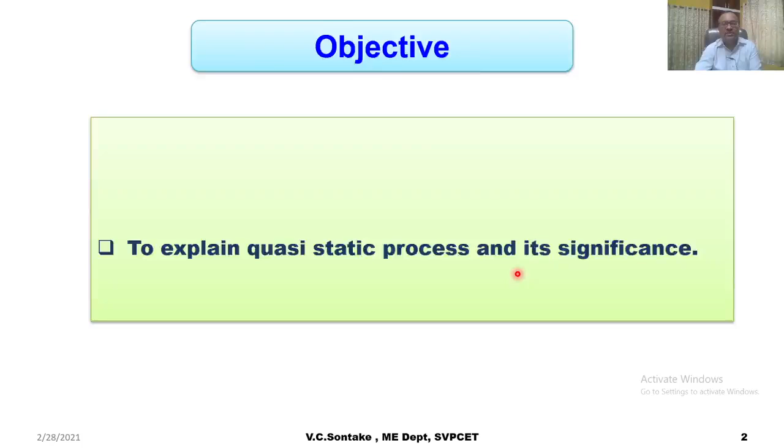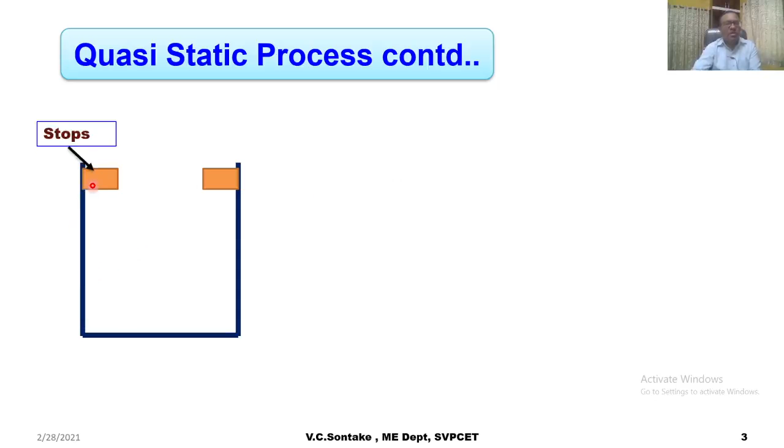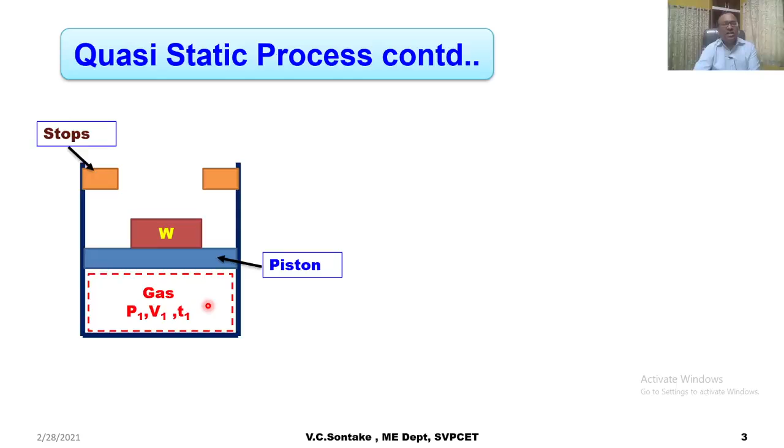So let us discuss quasi-static process. In order to discuss it, first let us consider a cylinder having stops at the top of its mouth. It contains a piston, and the piston and cylinder contain a gas with initial pressure P1, V1 and T1. Let us say a weight W is placed on this piston, such that it balances the pressure force exerted by the gas. So let's say this represents the initial condition of the gas as a thermodynamic system.

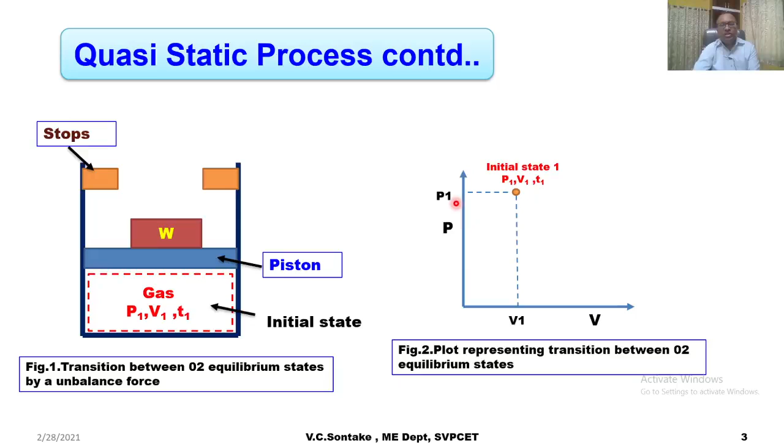The diagram will represent transition between two equilibrium states by an unbalanced force. Now I can represent the initial condition of this gas as a thermodynamic system on a property chart, the PV diagram. This represents the initial state of the system having properties P1, V1 and T1, where pressure is P1 and volume is V1.

Now the weight W is removed, so an unbalance will be created between the gas pressure force and the weight, and because of which the piston will move in the upward direction till it hits the stops. Let's say at this point of time, gas pressure is P2, volume is V2 and temperature is T2. This will be the final state of the gas, and I can represent this state on the property chart having properties P2, V2 and T2.

So what can I say? Initial state and final state were both equilibrium conditions, and the system has undergone a change of state from state 1 to state 2.

So I can say something has happened between state 1 and 2 because the system has undergone a change of state. But I don't have any idea about the intermediate states passed through by the gas as a system during this change of state from equilibrium state 1 to equilibrium state 2. So thermodynamics is not able to tell what has happened between these two states and how the properties of the gas have changed because of this change of state and the in-between intermediate states, since they are not equilibrium states.

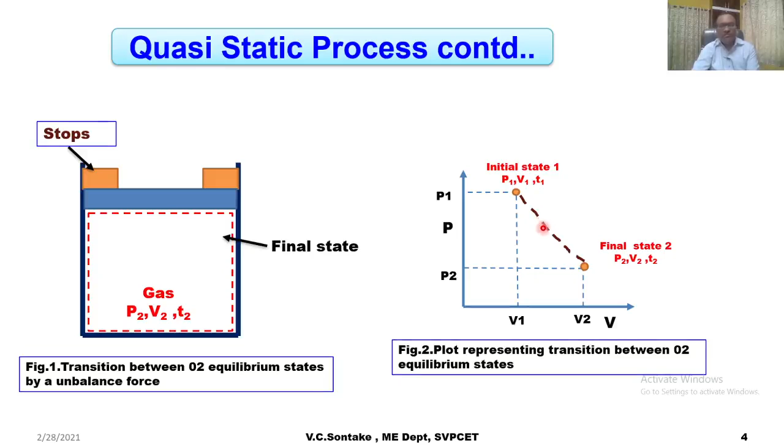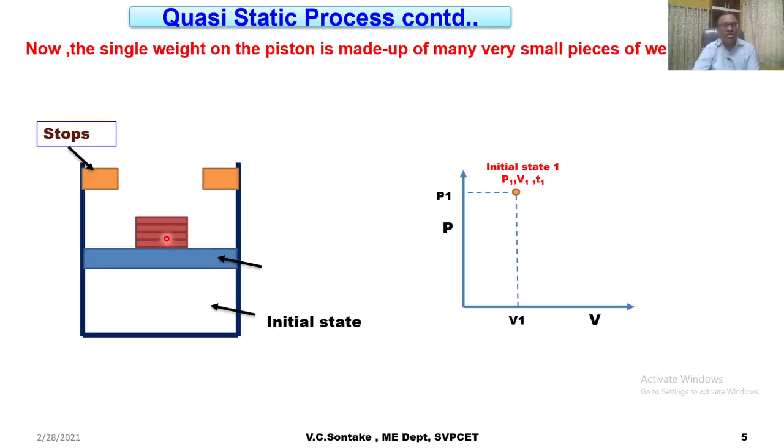Now, in another case, the single weight on the piston is made up of many very small pieces of weight. The entire weight W is divided into a small number of 4 weights. Let's say in this condition, the gas pressure is P1, V1 and T1, and the initial state of the gas is an equilibrium state, represented on the PV diagram by state 1.

Now in the next condition, the first weight is removed, so there will be some unbalance created, and because of this the piston will move in the upward direction under the influence of gas force. Let's say at this condition, gas pressure is P2, volume is V2 and temperature is T2, and this state is once again an equilibrium state.

Now why am I saying it is an equilibrium state? Because the weight removed was very small, infinitesimal, and because of its removal, an infinitesimal change has occurred, due to which the piston has moved infinitesimally in the upward direction. So the new state occupied by the piston is once again an equilibrium state, and I can represent this state on the property chart PV by state 2.

In another instant of time, we have removed the second small weight. Once again, unbalance will be created and the piston will move in the upward direction infinitesimally and then stop. Let's say at this point, the new pressure, volume and temperature are P3, V3, T3, and the new state occupied by the piston and weight is an equilibrium state, represented by state 3.

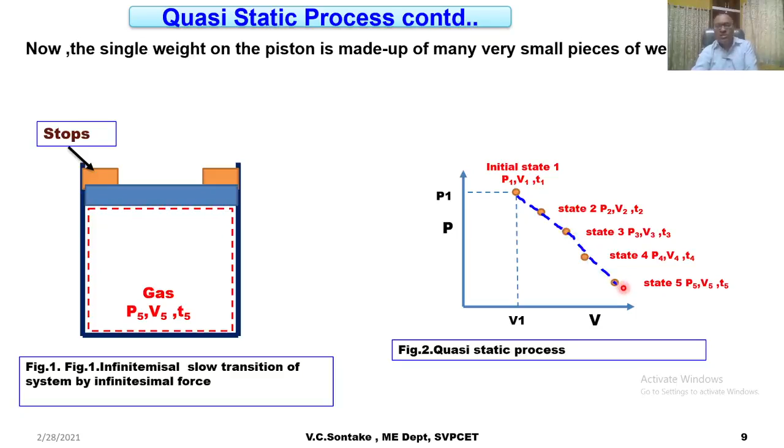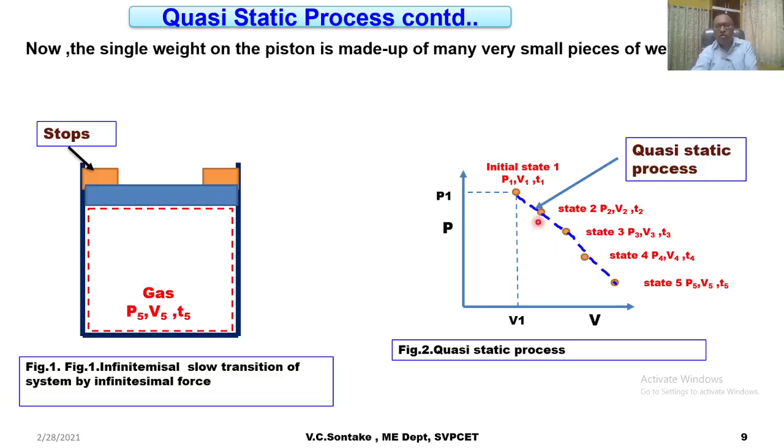So what is the system doing? The system is undergoing change of state by succeeding through equilibrium states. So if a system is undergoing change of state, or executing a process by succeeding through different equilibrium states, such a process is called a quasi-static process. So here, processes 1, 2, 3, 4, 5 will be quasi-static processes.

So what exactly is a quasi-static or quasi-equilibrium process? When a process is carried out in such a manner that the system remains infinitesimally close to an equilibrium state at all times, it is called a quasi-static or quasi-equilibrium process.

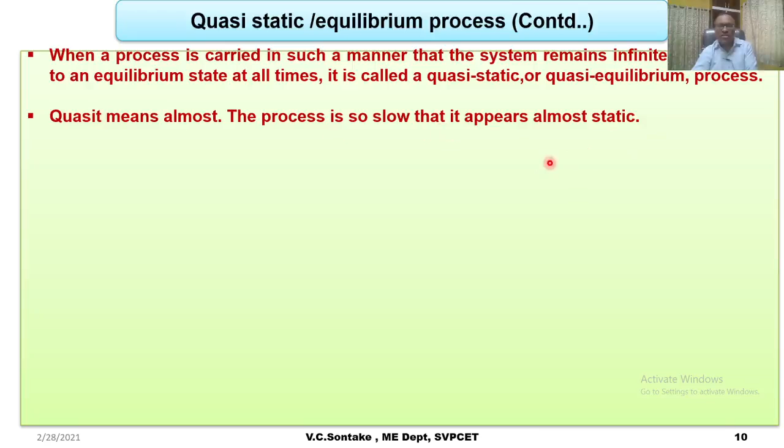Quasi means almost, so quasi-static process means it is almost static. The process takes place so slowly that it appears almost static. However, the process is taking place. A quasi-static process can be viewed as a sufficiently slow process.

A quasi-equilibrium process is an idealized process and is not a true representation of an actual process. It is a hypothetical and ideal process. Infinite slowness is the characteristic of the quasi-static process. It is a very slow process, that is why it appears almost static. It appears as if it is not occurring at all.

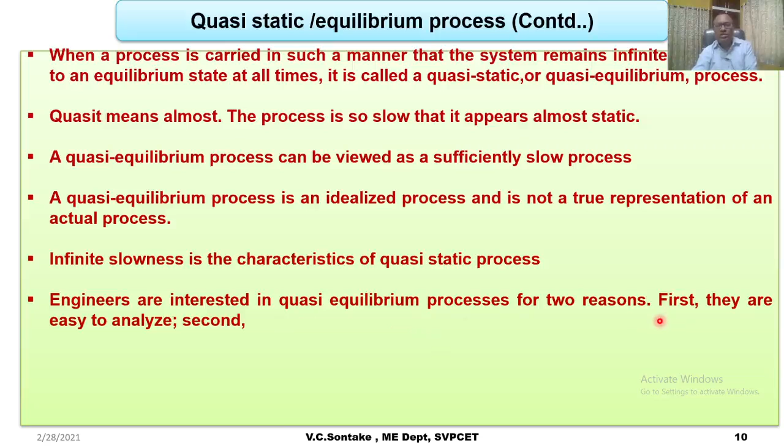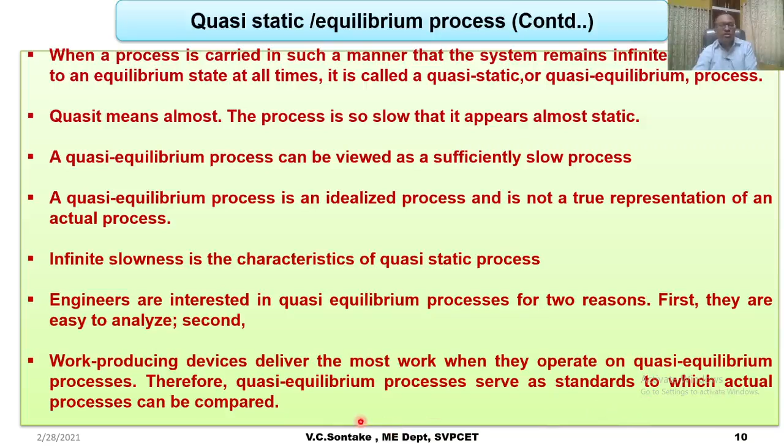Now, engineers are interested in quasi-static or equilibrium processes for two reasons. First, these processes are easy to analyze, and second, work producing devices deliver most work when they operate on quasi-equilibrium processes. Therefore, quasi-equilibrium processes serve as standards to which actual processes can be compared.

Now, examples of quasi-static process. There are so many practical examples which can be considered as quasi-static processes for the sake of illustration, like the darkening of skin color in summer.

For example, if you observe your skin color in the month of February and then observe your skin color in the month of June, there would have been significant difference. But during each day of February, March or April, you will not be able to identify or distinguish the change in the color of your skin with respect to the previous day. Though it has changed, you are not able to figure it out because the change in skin color is so minute, so infinitesimal, it almost appears the same color as the previous day.

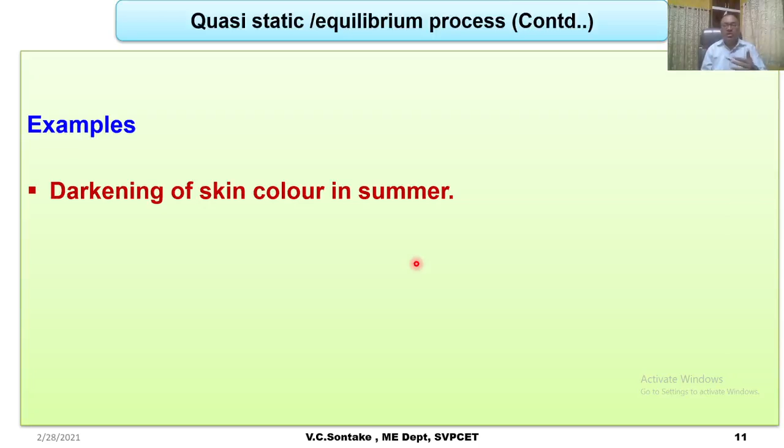But if you observe it as a whole, as a process of change of skin color from the month of February to the month of June, you will find there is a significant change. So I can say the darkening of skin color each day is an equilibrium process with respect to its previous day, and the changes are taking place infinitesimally small, and the process of changing color is so small, so slow. That is why it can be taken as a good example of a quasi-static process.

Then, fading of cloth colors over a period of time is the same thing. You cannot identify the change in the color of your clothes with respect to the previous day. But over 4 to 5 months, you will observe that the colors of the clothes have changed or faded significantly.

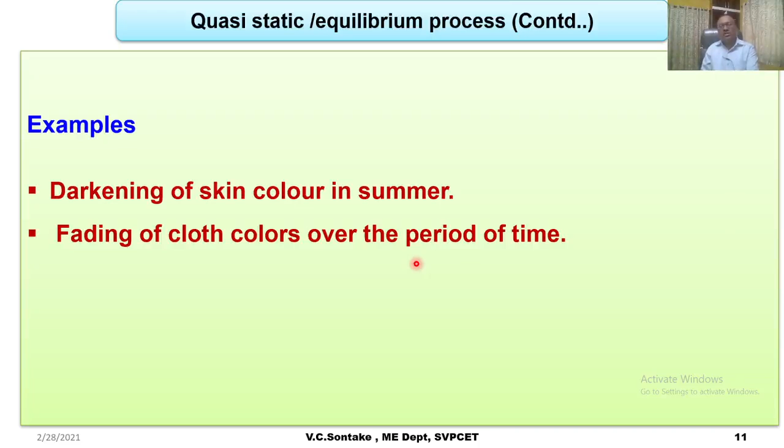Emptying a cooler tank with the help of a small teaspoon: if you have a 20-liter cooler tank and you ask someone to empty it with a teaspoon, they will remove only a few drops. So it will be difficult for you to observe any change in the water level of the tank. But it is changing, just so slowly, so infinitesimally, that you won't be able to figure it out with respect to the previous water level. But after 1, 2 or 3 hours, you will find the cooler has been emptied, even with the help of a teaspoon. So again, it is a quasi-static process.

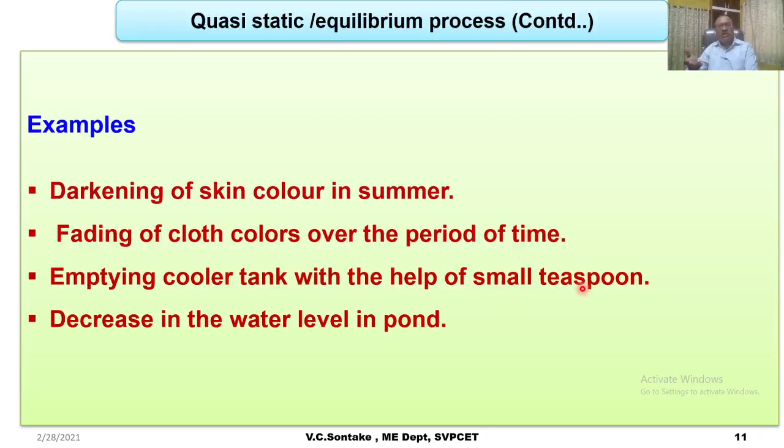And the decrease in water level in a pond is another example. So there can be many examples of quasi-static process from real life situations.